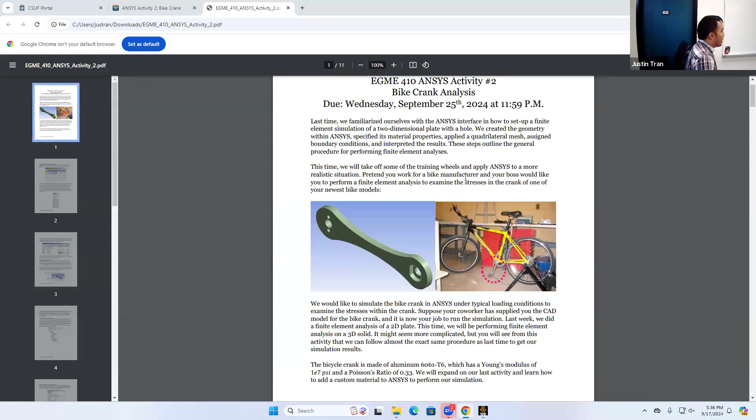The little story for this activity is that you work for a bike manufacturer or bike design company, and you're designing a new bike crank for your newest model. Let's say the design team has come up with this design for a bike crank. What your boss is interested in is whether, if we subject this bike crank to a pretty typical load it would normally experience, it would fail. So we're going to do stress analysis on this bike crank, more specifically failure analysis. Based on the results of our ANSYS simulation, we're going to find out whether this bike crank is going to fail or not.

The material for this bike crank is aluminum 6061 T6. The material properties are: Young's modulus of 1 × 10⁷ psi, and a Poisson's ratio of 0.33. Okay, and we'll go from there.

Does everyone have ANSYS Workbench open? Everyone have the part downloaded from Canvas? Okay, let's go ahead and get started then. Let's open up ANSYS Workbench and start in the same way we did last time: let's take static structural, and click and drag that into the project schematic here.

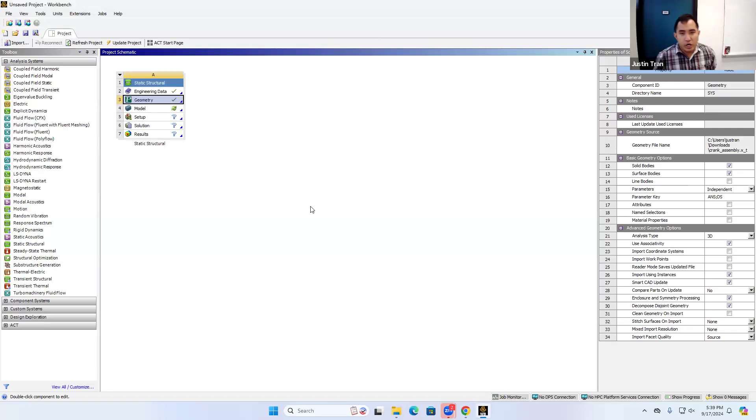If all goes well, the geometry will successfully import, and you should see a green check mark next to the geometry. The symbol changed as well, and this is just to let you know that the file format you imported the geometry in was a parasolid file.

Any questions on this? Was everyone able to import the geometry? Okay, good. We don't need to modify the geometry at all in this case, so we're just going to jump straight into mechanical. We don't need to open up DesignModeler.

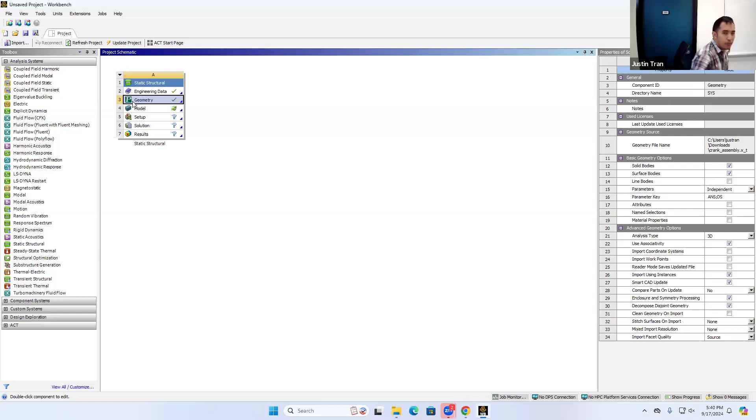But actually, before we jump into mechanical and before we start meshing, let's add our custom material property. We skipped over this in activity 1, so we didn't add any material properties because we were just using the default material. But let's see how to add a new material.

To add a new material to ANSYS, by default ANSYS only comes with one material, which is structural steel. So if your part is made of a material besides structural steel, you need to add it in manually inside Workbench here.

To do that, we're going to double click on engineering data here. After double clicking that, it's going to open up a new menu that looks like this.

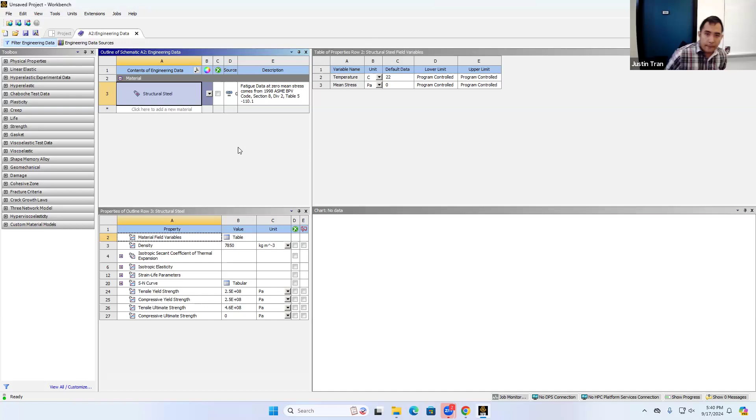So there's a lot going on here, let's look at each menu. The first thing that should draw your attention is this middle area right here. This lists all of the materials that you have loaded for your ANSYS simulation. Right now there's only structural steel, so that's the only material available to us.

And we're going to add a new material starting from here. If you go down to the bottom of the screen, there's an outline of all the material properties for the selected material. So if you click on structural steel, this lists all the properties for you.

Structural steel, you can see, has a density of 7,850 kilograms per meter cubed. It has a tensile strength of 2.5 times 10 to the 8 Pascal, and so on and so forth.

The cool thing about this is that if you change the units here, in this column you can look at the units, the value here is automatically going to be updated based on the units that you choose. So let's say we want to view the density in grams per centimeter cubed. You can see that once we change that unit, this value here is automatically updated. It's a neat thing.

So if you wanted to view the tensile yield strength in megapascals, right now it's 2.5 times 10 to the 8. If you view it in megapascals, it becomes 250.

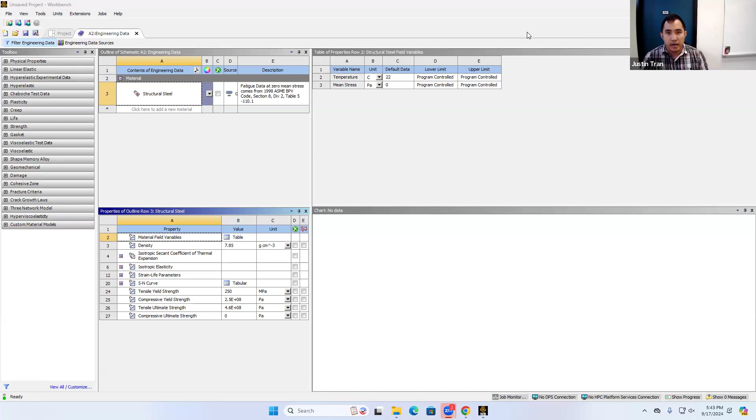Question? Yes. There's no engineering data here at all? Okay, I'll come back in a second. Yeah.

Okay, so let's go ahead and add our material here. Let's come back to this central area. You'll notice there's a box here for you to click to add a new material, so let's go ahead and click that.

At this point, it's going to ask you to give a name for your material. Since we're going to be adding aluminum, let's go ahead and name it aluminum 6061. Go ahead and hit enter.

Of course, you can name this whatever you want, but usually it's helpful to give your materials descriptive names. So let's go ahead and hit enter, and now we've created a new material for our engineering data.

What you'll notice is that there's a question mark here. This question mark means that this material is not completed, so we can't use it now. That makes sense because all we've done is give it a name, but we haven't assigned any of its properties at all.

All right, so the next place that we're going to look is on the left-hand side of the screen right here. This left-hand side of the screen is labeled toolbox.

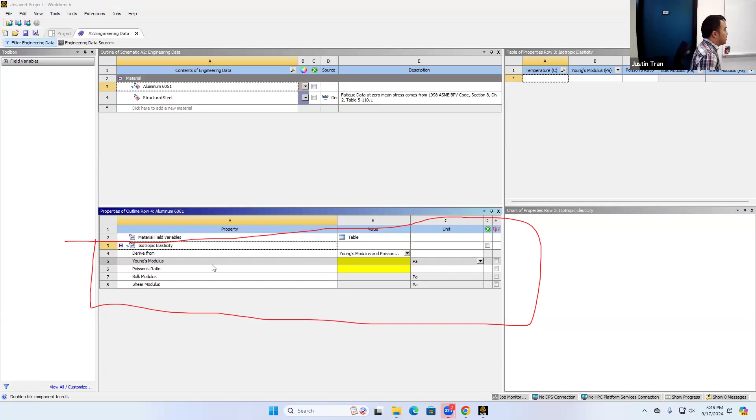Let's come back to the project specifications here. From the project specifications, we see that the aluminum we're using has a Young's modulus of 1 × 10⁷ psi and a Poisson's ratio of 0.33. So let's go ahead and add these values into ANSYS.

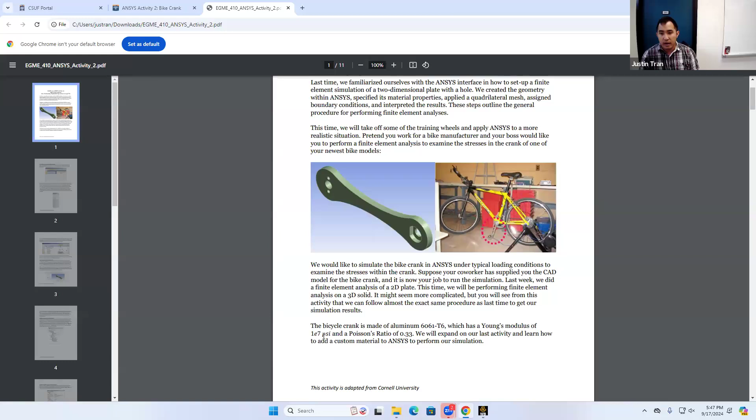We'll start with the Young's modulus. Be careful of the units here. Remember the units of the Young's modulus given to us in the document are in PSI, so we need to make sure we switch the units. Before you enter the number, make sure you change the units to PSI. Okay, with the units switched, let's go ahead and enter this here.

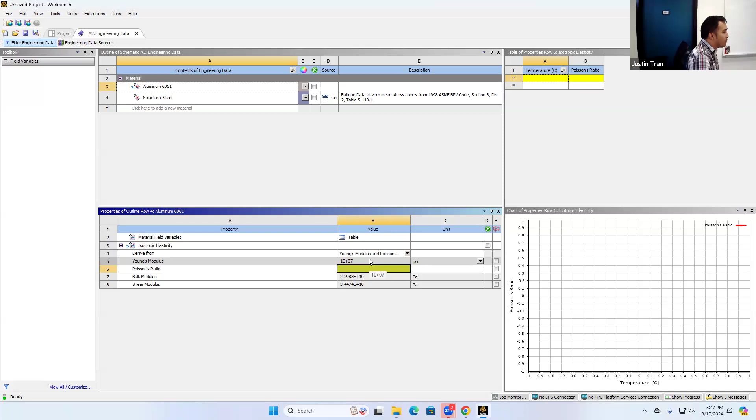Thankfully, ANSYS actually takes in scientific notation, so you can just type 1E7 and it's going to know what to do with that. For the Poisson's ratio, we're going to enter in the value of 0.33 and hit enter.

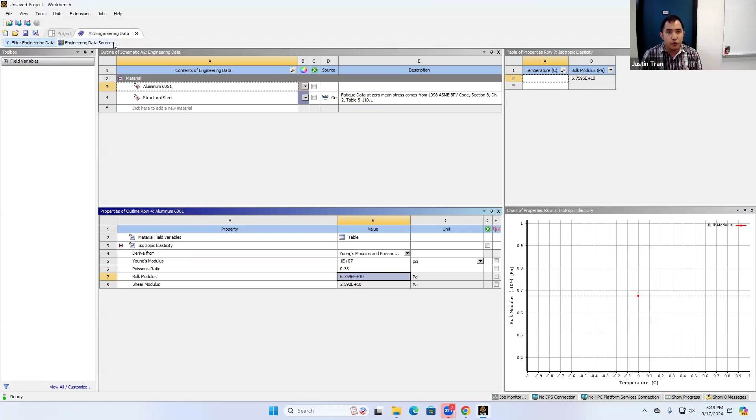Any questions on that? Everyone able to enter those materials just fine? Okay, so the next part, we're all done here. From here we can go ahead and close engineering data. If you look at the tab up here, you can close that. And the next step is to open up ANSYS Mechanical.

So open up ANSYS Mechanical, go ahead and double click on model here. Questions? Sorry, can you go through that last part?

Yeah, so from engineering data - it's going to be a little bit slow. Once you've finished entering the Young's modulus and Poisson's ratio, you can go ahead and close that tab for engineering data. It should be kind of in the middle, top left of the screen. And you want to come back to this schematic view, and then you're going to double click on model to open up ANSYS.

Let me make a quick round right now, so if you're not at this point yet, just raise your hand, I'll come to you, and then we'll do the next part today. But if you did everything correctly, you should open up ANSYS Mechanical and you should see the part.

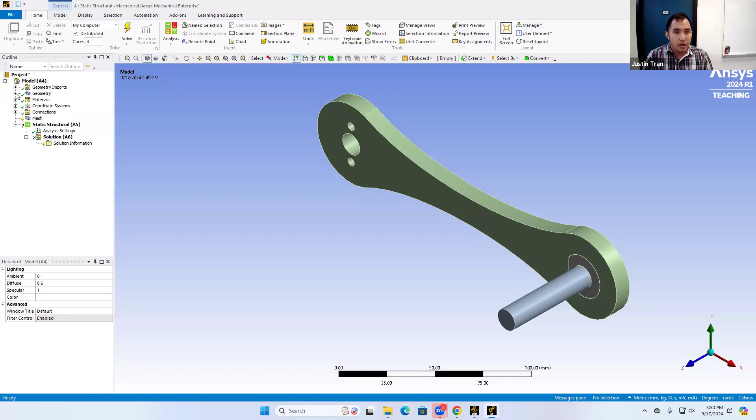Okay, so once you're in Mechanical, you should be able to view the part as it is, right? So this is our bike crank right here. And if you open up this tab here for geometry, you actually see that our part here is an assembly of three different parts.

So we have the main body of the shaft, we have the pedal, and we have this little connecting piece that connects the pedal to the crank itself. This is very common - it's very common to work with assemblies of parts in ANSYS, so if you save your assembly in SolidWorks, it would be imported like this.

For this analysis here, we're actually just focusing on the crank itself. We don't really care what happens to the pedal or that connecting piece in between. So what we're actually going to do before we do anything is we're going to suppress these parts.

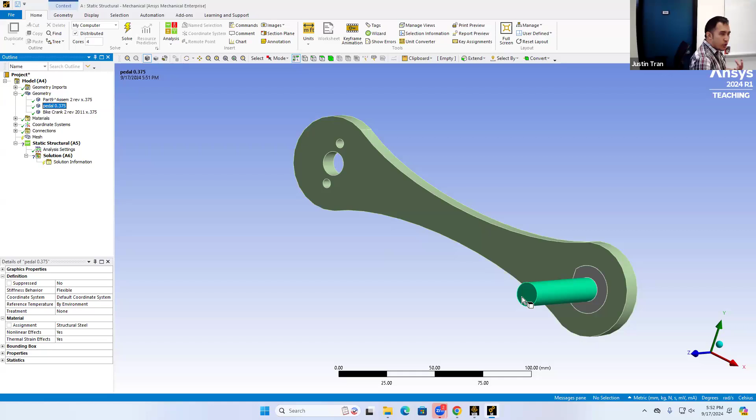This is something you're going to do very commonly in ANSYS, because a lot of times when you get a CAD model, when you use SolidWorks to design a part, you kind of design everything. But whenever you're running ANSYS, you want to minimize the amount of extra meshing space that doesn't really contribute much to the simulation itself. For this simulation, we're primarily concerned with the structure of the crank, so we don't really need the pedal or that connecting piece - all it's going to do is add extra elements for mesh.

It's going to make our simulation take longer for kind of no real benefit. So when there are parts of your assembly that you don't need in your ANSYS simulation, you can suppress them and effectively just remove them from the simulation.

To suppress a part, you're going to right click on the part that you want to suppress from the geometry tree, and you're going to click on the button for suppress body. Go ahead and right click on the pedal and then click on suppress bodies. That's going to remove it from your simulation. It hasn't been deleted, so don't worry that you modified your part.

You can actually unsuppress it and bring it back. All we're doing basically is removing it from the simulation, so it's not included in our mesh or our boundary conditions. So go ahead and suppress the pedal, and let's go ahead and suppress this Part9 Assem 2 rev and so on.

Should we have two materials active? Yes, yeah, we're going to do the material assignment after this. Go ahead and suppress those parts.

The next part that we're going to do is assign the material. Because even though we've defined our material in the engineering data, we haven't yet assigned it to our model itself. In more complex cases, you may have an assembly of different parts, and different parts of the assembly are made of different materials.

ANSYS gives you the flexibility to assign different materials to different parts, and you do that from this geometry tab. To assign a material to a part, click on the part you want to assign the material to, then in the bottom left-hand side of the screen, assign the material through this drop-down menu by clicking on assignment. You can see right now it's assigned as structural steel, which is the default, so we're going to change that to aluminum 6061. That's the material we just defined.

So before moving forward, you want to make sure that you assign the material as aluminum 6061. Any questions on this so far?

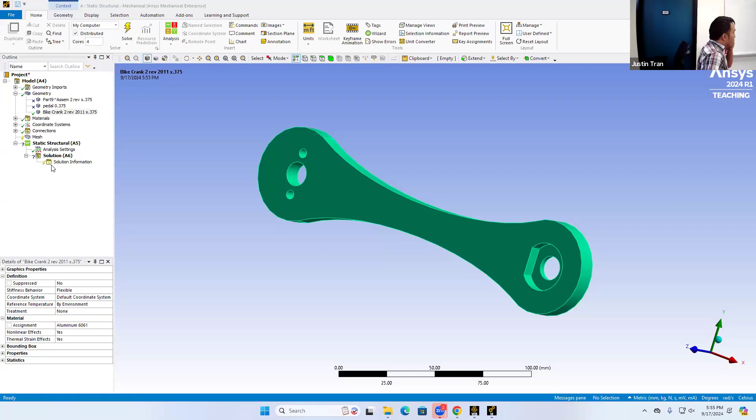Okay, let me go ahead and remove this. So the next step that we're going to do is the meshing. We had a lecture last Tuesday, about a week ago, on meshing, so now is the time that you get to apply what you learned.

We're going to do the meshing a little bit differently this time. Some of you have already kind of figured this out based on your activity 1. But ANSYS gives you ways to modify the mesh using these things called meshing objects.

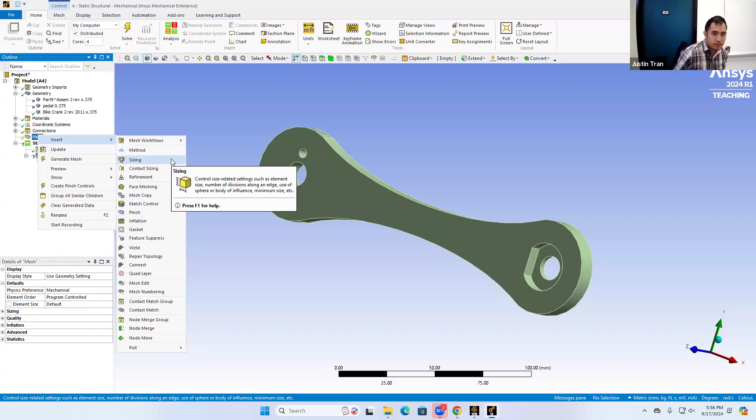In particular, I want you guys to pick the size of your mesh and pick the shape of the elements. To do those things, if you're going to be doing something more complex than just selecting the size of the elements, you're going to right-click on mesh, click on insert, and select this option for sizing. This sizing option is going to let you control the size of the elements in the mesh. Go ahead and click on sizing.

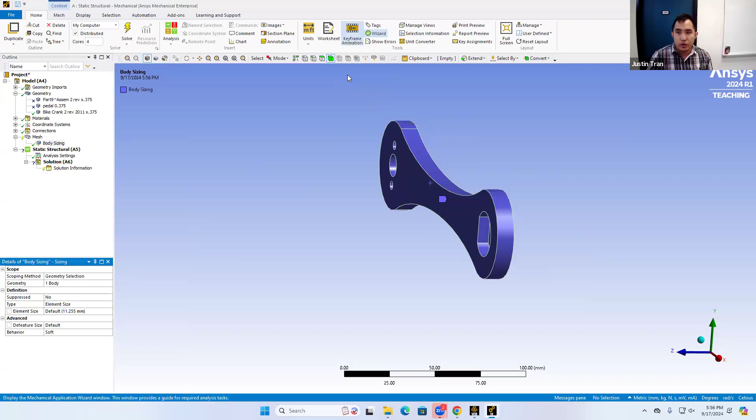It's going to ask you for two things: the geometry where you want to specify the size. For the geometry, make sure you select the entire bike crank, so this has one body right here. If you're having trouble selecting the entire bike crank, you can switch the mode to body selection, and that'll let you choose the whole body of the bike crank itself.

Okay, so from there you can choose the element size. The default right now is 11.255 millimeters. I'll let you guys choose that, but before we choose the size, let me show you how to choose the shape.

To choose the element shape, you're going to right-click on mesh, go to insert, and choose an object called method. Same thing, it's going to create a new object here called automatic method. Go ahead and select the entire body, and then from this method object, you can select the method and select the order.

Under method right here, you can see there are different options for the shape. You can take tetrahedrons, hex dominant, there are some other options here, but your main decision is going to be tetrahedron or hexes. We'll talk about some of these other techniques once we get into more advanced meshing later in the semester. For the order, remember you can choose either linear or quadratic.

Okay, I'll let you guys work for probably the next 10 minutes. Go ahead and choose your mesh. You can play around with the sizing, play around with the shapes, and by the end of 10 minutes you should have a mesh that you feel kind of good about.

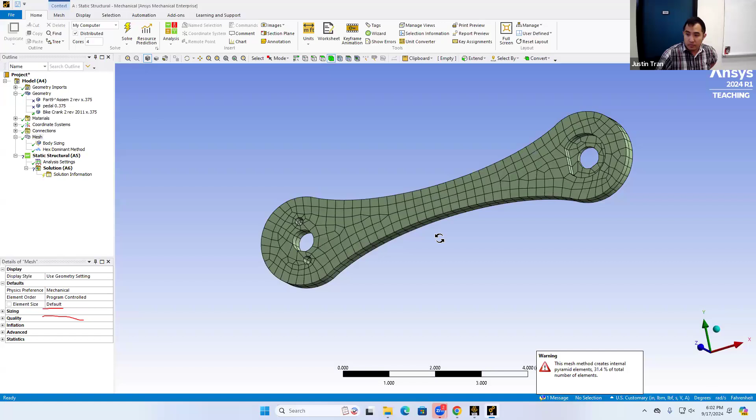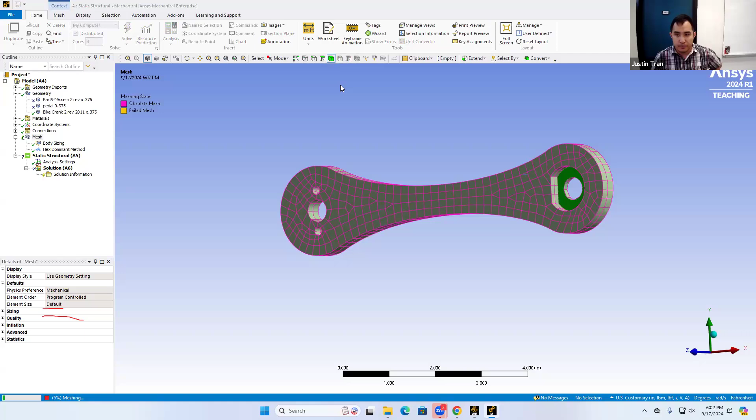Don't stress about getting your mesh to look like mine. Remember, there's a spectrum of meshes that work well. I mostly just want you guys to play around with it a little bit to see how to apply what you think about, what would be most appropriate for this geometry, and what are the most desirable mesh settings for you to use.

What is hex dominant? Is hex dominant the most optimal? So we talked last Tuesday, tetrahedrons are the most reliable for just getting a mesh, but in terms of accuracy on a per element basis, hexes give you the most accuracy.

Also, we put 0.1 millimeters. But how many elements do you guys have? It's stuck at 5%.

You want to be careful about the mesh sizing. If you make it too small, then your mesh is just going to be too big, and you're probably going to run out of RAM. So if it's taking more than 5 minutes to create the mesh, you probably want to close ANSYS and reopen it.

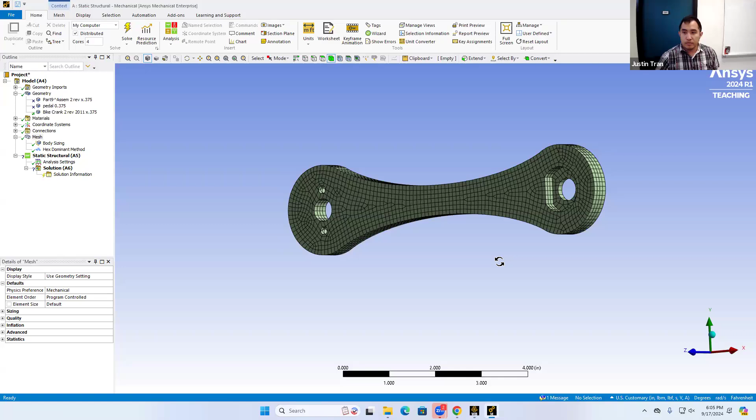Yeah, you want to be careful not to use a mesh size that's too small. 1 millimeter, wait, so I'm going to check how much it's running. Not with the CSU budget, we don't have enough for it. Let's do, 1 millimeter is going, we're at 505,000 elements. That's too much, and remember there's an element limit of about 100,000 elements. I have 73,000. If you're using the student version, that might be too much. But I think it did, yeah, you might want to restart ANSYS. Or should I just wait? Do you think I should wait? If you did 0.1 millimeter, I think you're going to be waiting all night. Okay, that's closing, goodbye, so yeah.

So a lot of you are learning that the mesh element size plays a big impact on the mesh itself. If you remember from last Tuesday, generally you want to use a smaller element size, and a smaller element size would generally lead to more accurate simulations and it looks nicer too. But everything comes at a cost. If you pick a size that's too small, it's going to take forever for your mesh to generate. And even if you're able to wait it out, let's say you get a mesh with like 1 million elements, and you somehow have a pirated copy of ANSYS that I'm not going to ask questions about, if you try to run the simulation on that, that's going to take even longer as well. So there's a delicate balance between how many elements, how much cost you're willing to tolerate versus how much accuracy you want from the simulation.

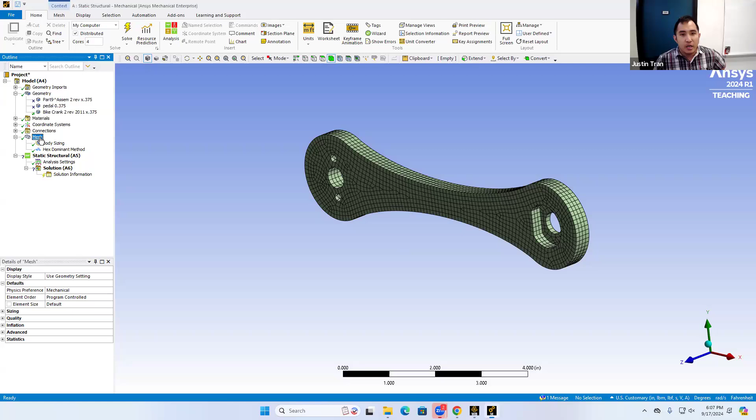Good question from the chat in Zoom: what's the difference between element size under mesh versus element size under body size? That's a really good question. If you specify the element size under mesh, that's kind of what we did in activity 1 - this sets a global size for your entire product. Under body sizing, this allows you to specify the size for specific areas of your mesh itself. Right now, because we only have one part, they're both kind of the same thing. But there will be situations later on where you have an assembly of several different parts, and you want the sizing to be different in different parts of the model. By creating a body sizing object like this, it lets you specify different sizes in different areas.

So I'm introducing this - for this activity it doesn't really make a difference because we have one part. But in activity 3, you're actually going to have several different parts of the assembly, and so you're going to need to specify the sizing differently. Is there a question over there too?

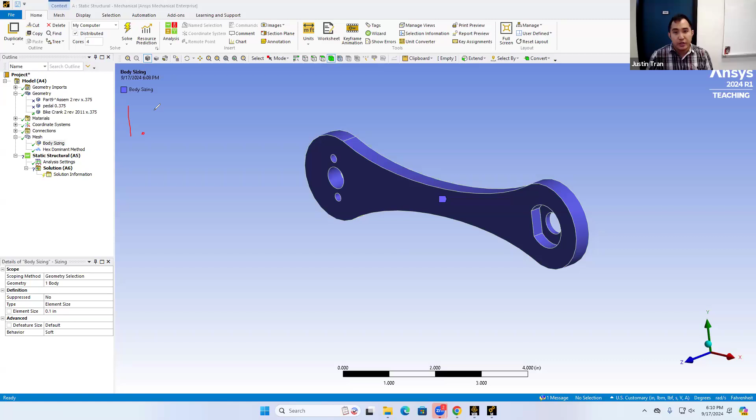Remember, boundary conditions is what we talked about last Thursday. The boundary conditions denote all of the exterior effects that are being applied to our bike. For this bike pedal, there are two main effects I want you guys to account for. The first is the fact that this bike crank is going to be attached to a greater bike—I want you guys to assign a boundary condition that encapsulates that.

Hate writing with the zoom thing because it makes my writing look like a serial killer. Okay, attached to bike, right? Reading it in the mirror like a scary movie.

The other boundary condition I want you guys to account for in your simulation is the fact that there's going to be some load applied on this bike crank as well. That load is going to be 100 pounds. So I'm going to set the value—100-pound load. And that load is going to be applied directly on the pedal, to simulate the situation of someone pressing down on the pedal as they're biking.

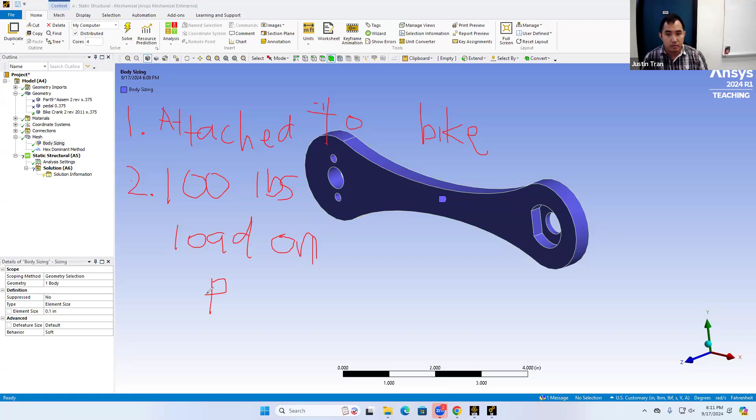So those are the two boundary conditions I want you guys to specify in this simulation. As you're doing that—and I'm going to give you guys 10 minutes to work on this—I want you to remember two considerations. The first is that, for any structural simulation, you need to have a fixed support somewhere in the model. So make sure you add that.

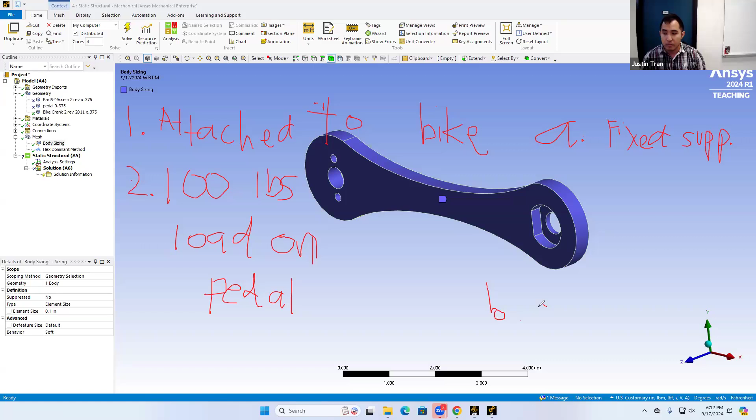The other thing I want you to consider is that, even though I told you the magnitude of the load is 100 pounds, and already told you the location where it's going to be applied—on the pedal—what I want you guys to think about is the direction of the force. I'll let you guys think about what makes sense for the direction of the load.

There's a few things I want you to think about as you're doing this. For the fixed support: we know there has to be a fixed support somewhere in the model. Generally, the location where you apply the fixed support is where your part is attached to something bigger. Because when you have a small part attached to a bigger structure, that bigger structure is going to be relatively immovable compared to your part. So wherever this bike crank attaches to a bigger structure, that's where you want to fix it.

And then for the direction of the load—remember, the goal of this study was to find out if this bike crank is going to be able to withstand the loads. So even though I've already given you the magnitude of the loading, I want you guys to think about what's the worst case scenario: what direction can this load be applied on the bike crank that's going to lead to the highest amount of stress in the bike crank?

The location is already confirmed, so it's going to be at the pedal itself. But you can choose to have the load go this way, or you can choose to have it diagonal.

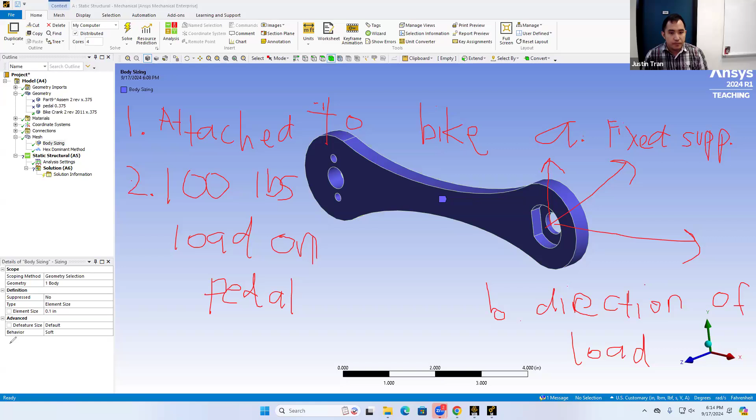Let me get you started. Remember, to add a fixed support, we're going to right click on static structural and insert a fixed support. Remember, for the fixed support, you're going to specify the geometry, or the parts where you're going to apply the fixed support. Then the other thing you're going to specify is a force load, so you're going to click on force.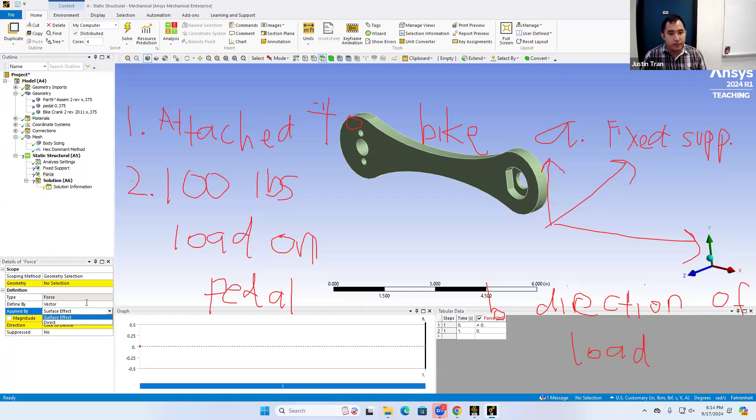Remember, under force, the easiest way to choose a direction is to change this 'define by' setting. Instead of defining it by a vector, you're going to define it by components instead, and individually select the components of the X, Y, and Z directions.

To change the direction, you would specify the components differently, but the magnitude of your force should still be 100 pounds. If you're going to put it in a diagonal direction, let's say diagonally in the X and Y direction, then you would use the Pythagorean theorem to choose the components, but the magnitude of the loading should not exceed 100.

I'll let you guys work on that for the next 10 minutes. If you have questions on anything I mentioned here, just go ahead and ask. But go ahead and choose the boundary conditions. If you're still working on your mesh, raise your hand and I'll come around and answer your question.

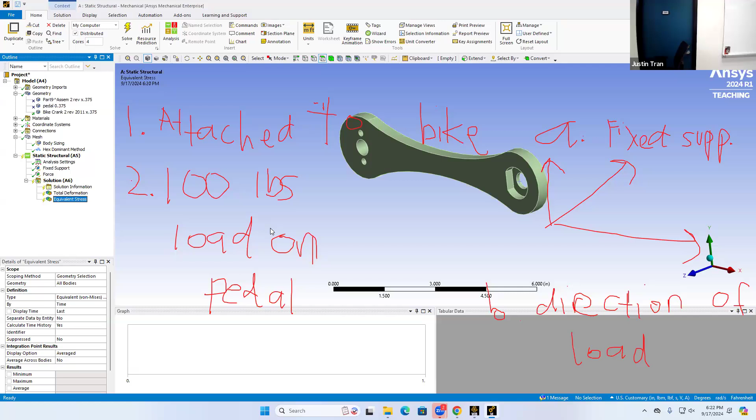Okay, so once you've kind of decided on the fixed supports and the forces, let's go ahead and run the simulation.

Okay, so actually, let me get rid of my serial killer writing here. No, for the.

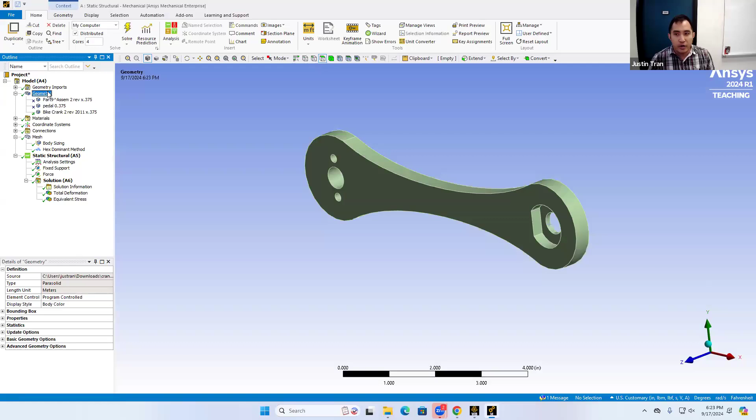Okay, so walking around, I think everyone's kind of figured out where the fixed support should go. The fixed support should be applied on this side of the model. Generally, my thought process is that wherever this part attaches to, there's normally going to be some screw holes or screws, so that's usually where I like to fix the model. In this case, for a bike, the two screw holes are these ones right here, so I would fix it here.

Some of you have also fixed this center part right here. That's fine for this case—it's not going to make a big difference in the result. But since these two smaller holes are the ones that are going to be screwed into the bike frame, that's where I would fix it. The force, of course, is being applied on the other side, which is where the pedal is.

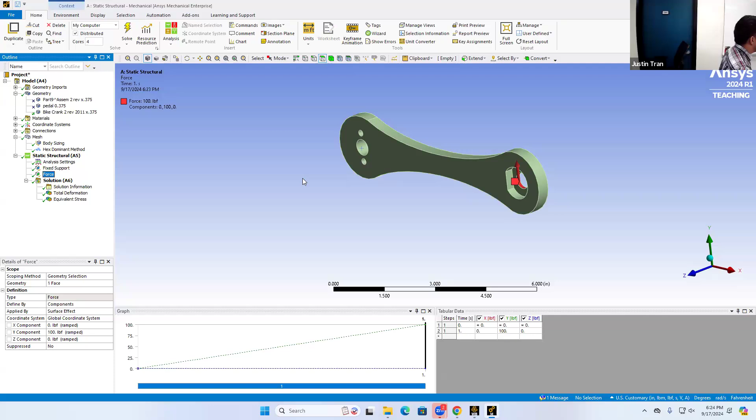Now the big question is: what direction do you want to put the force in? What I told you is that you want to choose the direction that's going to result in the most likely failure. So there are questions of whether you should put it in the Y direction, the Z direction, or the X direction.

Well, what we have here is essentially a cantilever beam—a long slender part that's fixed on one end, and we're applying a force right at the other end. In these situations, when you have a long slender part, the easiest way to break or snap it is to apply a bending force.

If you look at a pencil in front of you, and someone told you to snap it, the most intuitive thing you would do is apply a bending load and try to snap it like that. You wouldn't try to compress it, or bend it at a weird angle—you'd try to snap it with a perpendicular force.

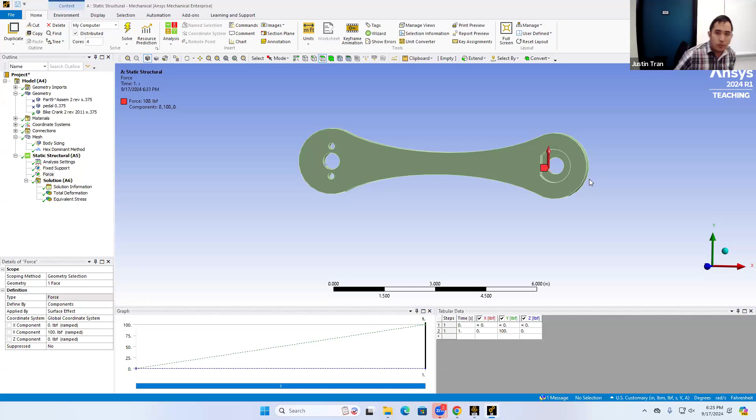For that reason, I've chosen to apply my force in the Y direction. The Z direction would work pretty well too, but it's not often you're going to apply a force in the Z direction on a bike, since that would be coming out of the page, and that's usually not a direction a person would press down on the pedal. So between the Y and Z directions you'd probably get the maximum force, but the Y direction is more likely in terms of how someone would actually use the bike.

Okay, so let's look at the stresses. When I plotted my equivalent stress field, it looks like this. I get a maximum stress of about 13,000 psi. If you want to change the units, I'm using US customary with inches here. And I get a total deformation of about 0.05 inches. That's with a 100-pound force on the bike.

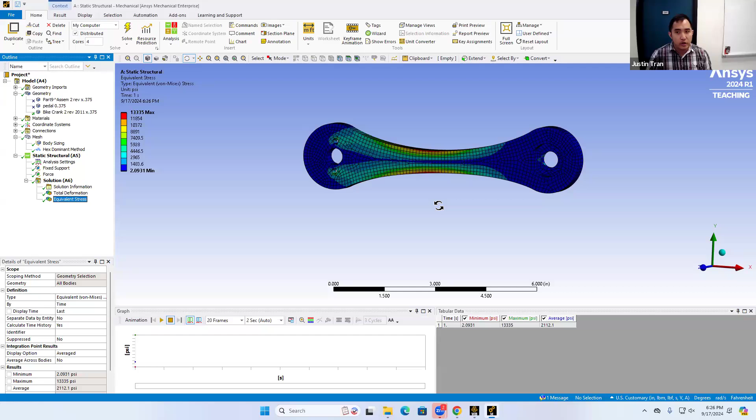So now, of course, the question is: with this 100-pound force, is the bike frame going to fail? Let me come back to the project specifications.

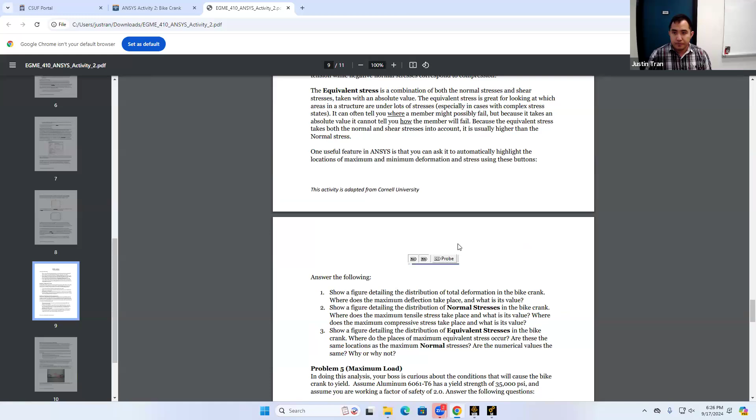Under problem 5, you should see that this material has a yield strength of 35,000 psi. So as long as the equivalent stress is less than 35,000 psi, the bike crank is not going to fail. It's going to be completely fine.

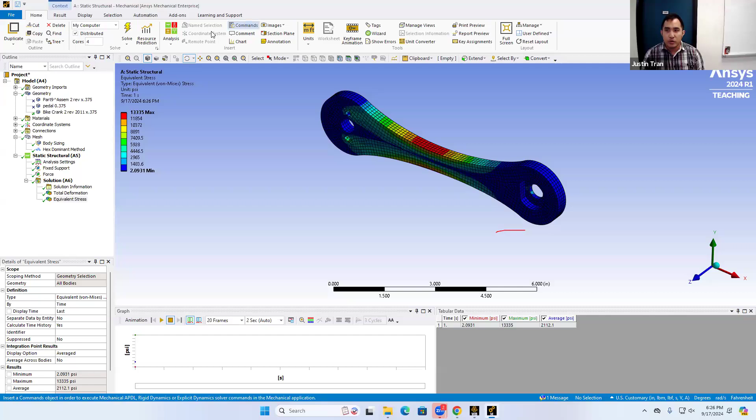Let's come back to our simulation. We see that the maximum equivalent stress is only 13,000, or 13,300 to be exact. Since 13,300 is less than 35,000, the yield strength of this material, in this case the bike crank will survive.

So you can apply a 100-pound force on this bike crank and it's going to be just fine. That answered that question. So that is the main part of this activity.

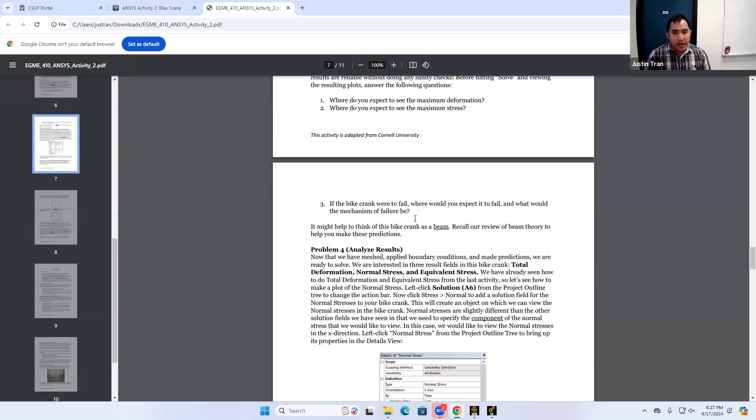So for homework, let me go over what you guys need to do for this activity. We've basically done problems 1 through 4 already in class today, so you guys are going to pick it up from problem 5. In problem 5, I want you guys to determine the maximum load, or maximum amount of force, that this bike crank can take before it becomes in danger of breaking.

For this part, you're going to come back to your simulation, go to your force, and increase this force magnitude until you see a stress that's strong enough to break it. We already know that 100 pounds is not strong enough to break this bike crank.

So let me go ahead and increase this to 120. You increase the load amount to 120, click solve, and what you should see is that the equivalent stress is going to go up. You can see here that I've increased the load to 120, and the equivalent stress has gone up to 16,000.

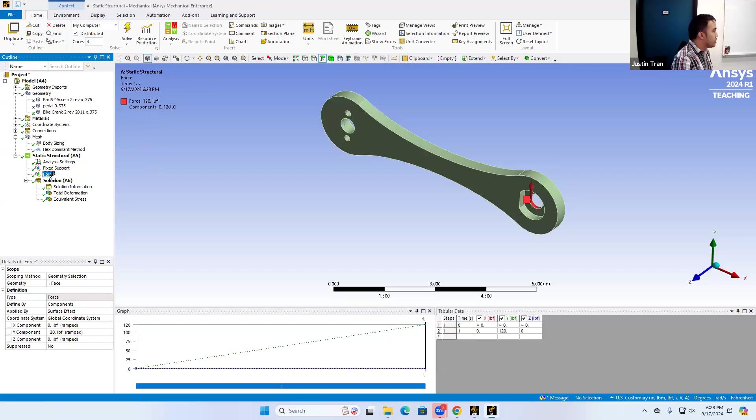So I want you guys to run the simulation a few times — change the load, run the simulation, check the stress, change the load, run the simulation, check the stress — and I want you to get as close to the yield strength as possible.

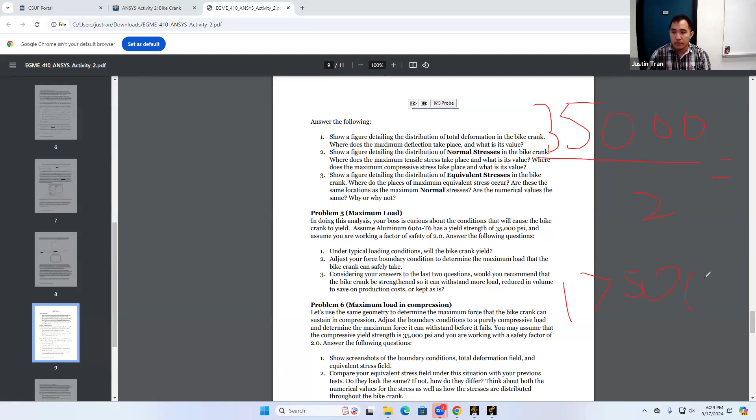How do we know when we reach it? The yield strength in this case is 35,000, but I want you guys to work with a factor of safety of 2. So instead of getting to 35,000, I want you to get as close to 35,000 divided by 2, which is 17,500. So run the simulation over and over, changing the amount of load, until you get a maximum stress as close to 17,500 as possible.

Right now you can already see that 120 is not enough to get up there, so we need to increase this a bit more. I'll increase it one more time because I already know the answer in my head — if I get any closer, we'll know the answer. Let me go up to 122.2. If I increase the load to 122.2, you can see that this equivalent stress creeped up a little bit more, going from 16,000 to about 16,300. So I want you guys to iterate on this, changing the loading, getting as close to 17,500 as possible. Okay, that's problem 5.

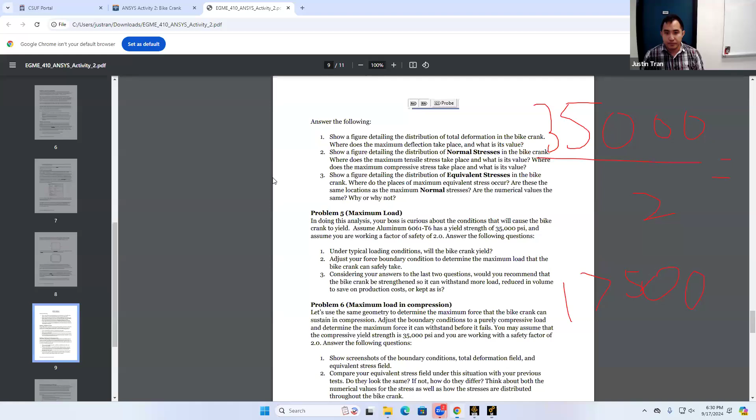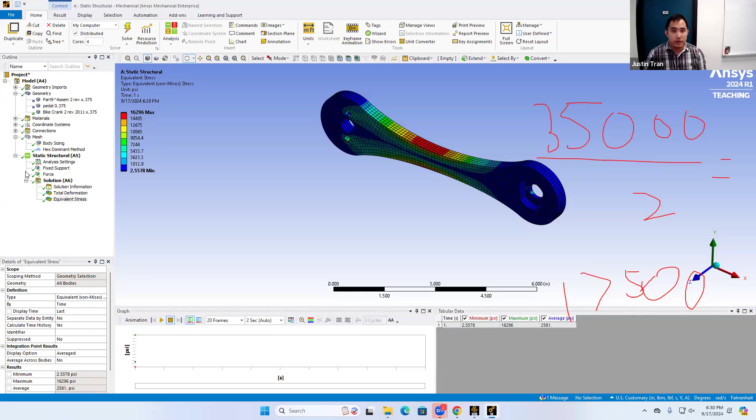Problem 6, I want you guys to do the same thing — I forget to fix this every single year, but problem 6, same process. Increase the load until you reach 17,500, but change the direction of the loading. Instead of applying a bending force, apply a force in the compressive direction. So instead of applying the load in the Y direction, apply the load in the X direction, and then do the exact same thing: increase the load until you reach a maximum equivalent stress of about 17,500.

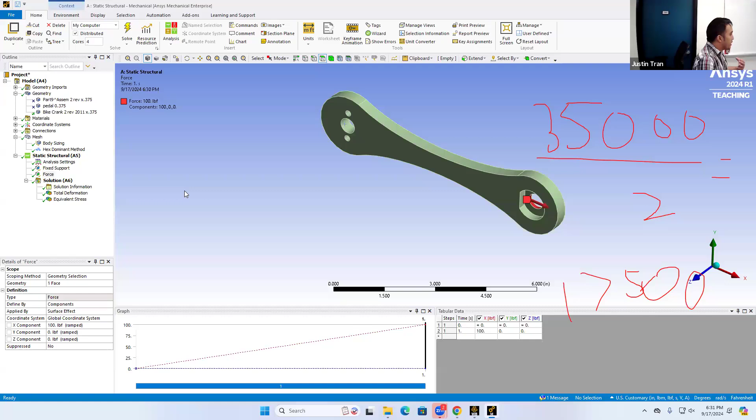What you're going to see is that, because the direction of the load is changing, we're instead producing a compressive stress instead of a bending stress. And what you're going to find is that this bike crank can sustain a lot more load in compression than in bending.

So you can see here, I actually did tensile stress by accident, but you can see the stress is much lower in this case. Okay, so that's problem 6. I want you guys to find the maximum load that it can take in compression.

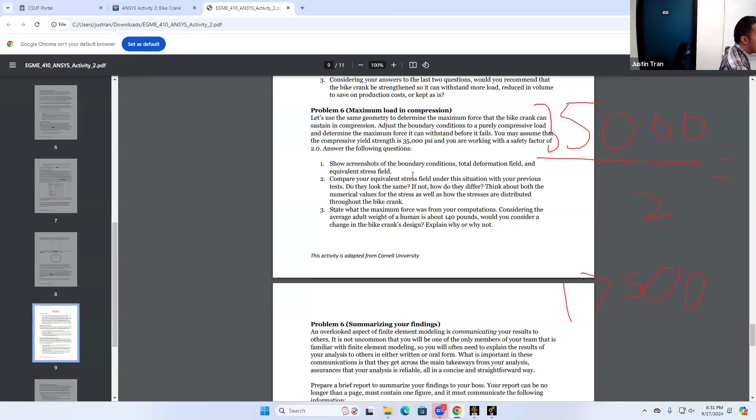So from there, there are a couple other parts. I'll fix the numbering, I'll go back and change it. So problem 7 is going to be summarizing your findings.

So from this activity onwards, this is going to be a part of every single activity. I want you guys to get in the practice of communicating your finite element results to other people. On the one hand, it's great to be able to write a full technical report with lots

of figures and detailed information about your mesh. But in reality, when you're working with finite elements and communicating things to your manager or coworkers, a lot of times they're not going to have time to read a whole report.

So I want you guys to get in the practice of communicating your finite element results basically like an email. And in this email, you need to communicate a few different things. First, you need to communicate your results, right?

You can think about the objective of your finite element analysis and whether your objective was met. In this case, our objective was to find out whether this bike crank would fail under a 100-pound load. So you need to express that in your summary.

Another thing you need to communicate is that you set up your simulation properly. You need to have some information on the mesh that you created, some information on the boundary conditions you specified, a little justification on the mesh size, and a little justification on the boundary condition you chose.

Because you need to be able to convince people that you set up the simulation properly.

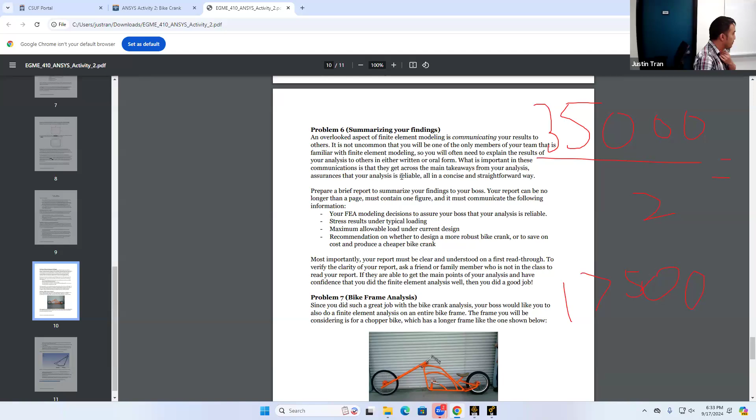All right, and then finally, problem 8—I'll fix the numbering—is I want you guys to run through another finite element analysis on a bike frame. If you go back to the page on Canvas, you'll see that I posted a second CAD model.

It's called Cycle Chop Ram 1. So this is a CAD model of an actual bike frame. You can look at the frame right here.

And I want you guys to do an analysis from scratch on this frame. I've included instructions on the limitations for the mesh, and some instructions on the loadings that you need to apply.

Because now that we've covered all the basics of ANSYS, now it's about getting practice doing it in different situations. So we spent the majority of today working on the bike crank itself, but for this activity, I want you guys to do another analysis on this frame as well.

Any questions on the activity here? Okay, all right, so that's all I got planned for today.